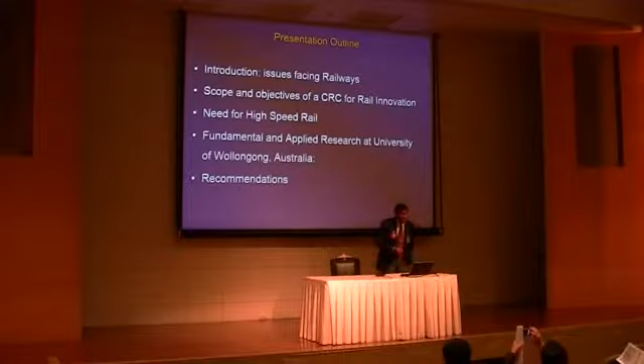The presentation outline I have is looking at the issues facing the railways currently, and some of the problems you will see in Australia are common to the rest of the world as well. I will look at the scope and objectives of a CRC for Rail Innovation, the cooperative research center framework that started all this research in Australia in a cooperative scheme, which I will explain in more detail later. And the need for high-speed rail.

Is there really a need for high-speed rail? If you really need high-speed rail, why do you need that? Is it just for competition with the rest of the world, or is it because the country really needs it? Those are philosophical issues that need to be addressed both politically and socially.

The fundamental and applied research: if you are going to modernize the railway tracks and do a very good job of these rail tracks, then you can't do trial and error. It's risky. If there is a derailment of a train with hundreds of fatalities, it only has to happen once and the entire country will regret it. So there has to be research. Governments will have to spend money and give universities that money to do research, because you can't do high-speed rail without doing the background research.

Every country is different. Every country has different soil conditions. Every country has different ground problems. So you can't simply copy from Japan or China and think that it will work the same way. I will address some of these things in detail as well.

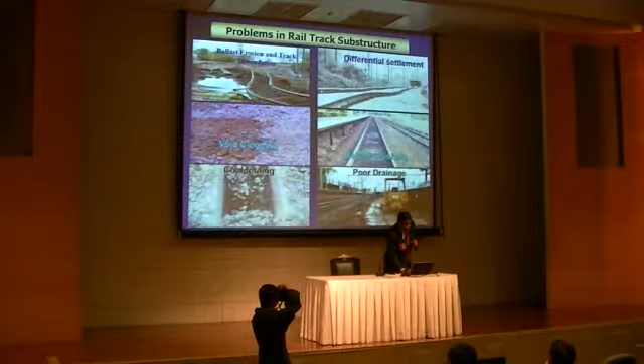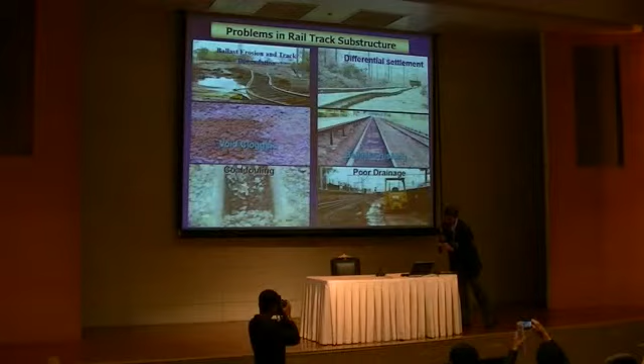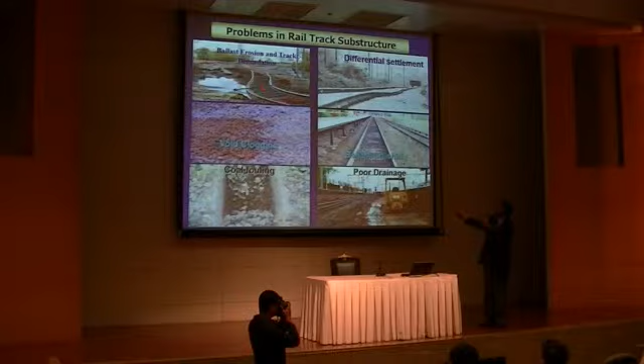Now some of the problems you see here in railways are common to many countries. Flooding. Now that's a slide where constant flooding in the state of Queensland, Australia, has practically affected railway tracks. If you look at this track, there is no ballast left. The rock particles have been taken away by the floods. If you look at this track here, you can see the differential settlement, and that is because of the very soft soils in the coastal areas.

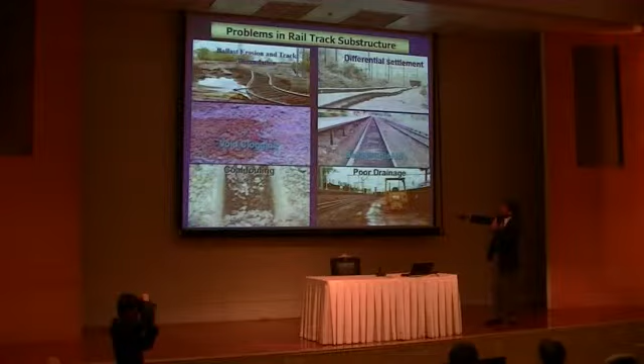And Thailand is no different. Soft Bangkok clay is well known in the world. You are going to get settlement of soft soils, and that is what happens at high speeds. Some of the soft soils below the track will liquefy under high cyclic loads, no different to what happens during earthquakes. The soil will liquefy at certain speeds and pump up and pollute the ballast, then dries up, and this mud clogs the voids of the particles. When that happens, there is no drainage, and that's what happens here.

Now this is a track close to the University of Wollongong. The railways can't operate, so all the students have to take buses. That's quite common. You can see the amount of water here after the rainfall, because the tracks are no longer drained due to this problem. So the tracks have to be abandoned until repair and maintenance works are implemented before the track can operate.

Ballast crushing is another problem. At certain speeds, particles start to break up into smaller particles. And once the particles become smaller and smaller, the bearing capacity of the track goes down very quickly.

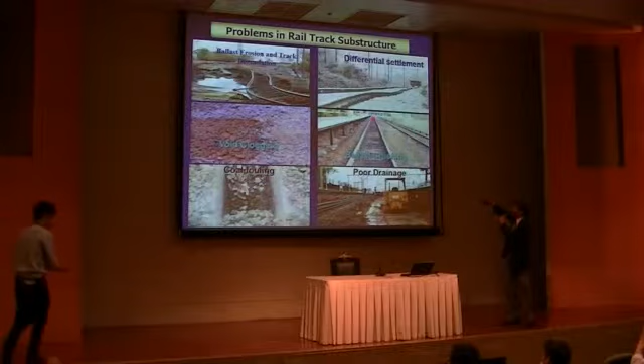It goes down exponentially because the friction angle of the particles exponentially decreases when the size decreases. So that track is abandoned. If you look at the sides, you can see the particles, but not in the middle of the track, and those particles have been broken.

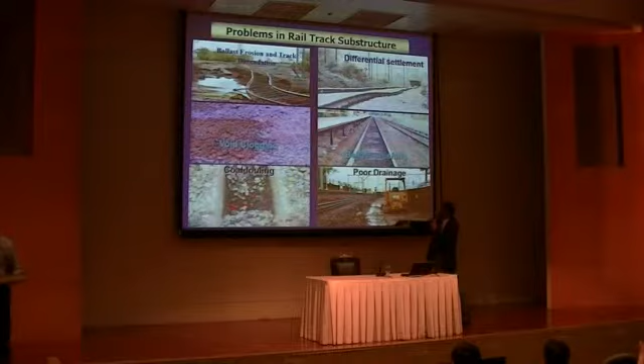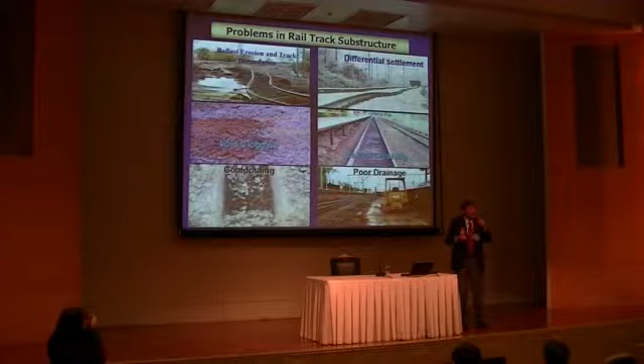Then we have the problem of coal fouling. Now that's a man-made problem. Coal tracks, coal carriages, when they travel, especially in the state of Queensland in Australia, you fill the wagons too much when the train is stationary. But when the train starts to move, all these big mounds of coal start falling down into the track and start clogging. It's the same problem as that now - you don't get drainage after that.

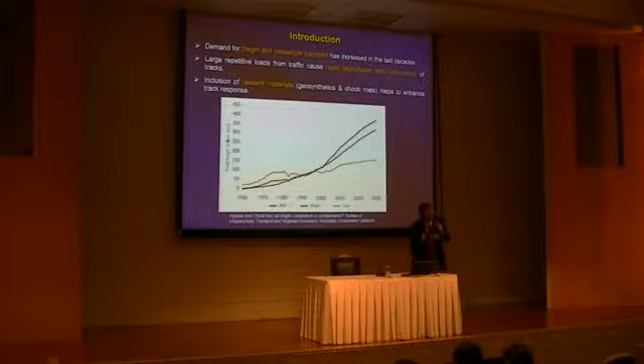Ports seem to be relatively stable because it's not easy to expand harbours everywhere. But rail in a big country like Australia can be made anywhere - you can have shorter routes. So this is what you see: the demand for rail has been increasing significantly, and I believe this is the same situation in most other big countries like US, Canada as well.

So just to give some idea of the Australian rail scenario, currently there's a labour force of about 45,000 people in Australian rail - that's employees directly employed in railway organisations. And then 70,000 plus people work in industries, both civil, electrical, mechanical and so on, providing services for the railways. So altogether, approximately 120,000 people are involved in railway-related employment.

If you look at the amount of funding the Australian government has been spending, 36 billion is investment in commitments for rolling stock and track. Now that's not a huge amount of money if you think of Australia as a big country in geographical size. But we have only 22 million people in Australia, so in terms of population, that's a very decent funding.

We have 44,262 kilometers of track in Australia, the second largest in the world. 725 million annual customer journeys - for 22 million people, that's a lot of traffic. 853 million tons of freight moved. Being a big mining and agricultural country, a lot of produce from mines and agriculture has to go interstate very quickly, where trains are obviously the best choice. That's a lot of movement for 22 million people.

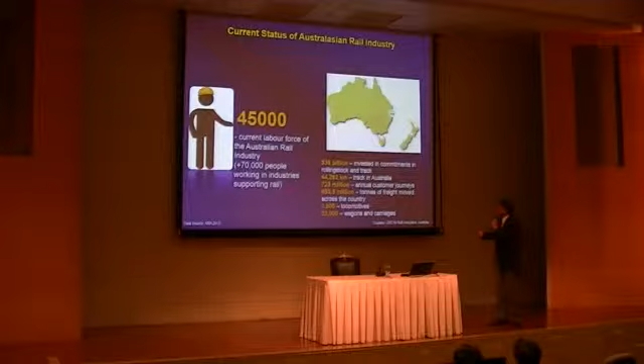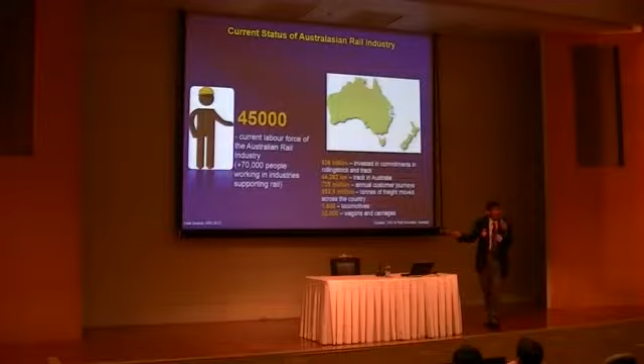We have 1,800 locomotives traveling across the country and 32,000 wagons and carriages. These are statistics from 2012, so this is very recent and increasing as we speak.

Now coming to the railway research culture - I think when I asked Dr. Pirupong exactly what he wanted me to talk about, he said that Naresuan University and other universities want to organize a cooperative research culture and do work on railway research, and whether I could give some hints as to how I started this in Australia in the 1990s. And that's the cooperation - that is the main key word.

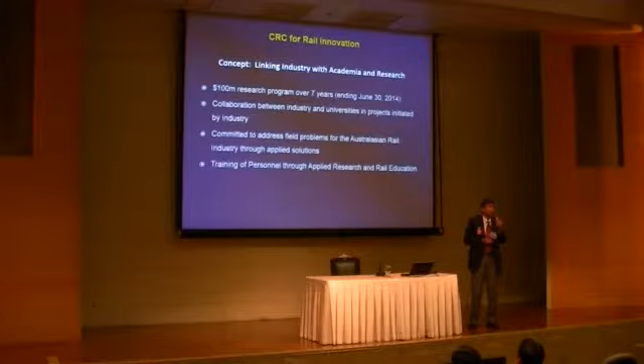The concept of the Cooperative Research Center, CRC, for rail innovation is currently the biggest cooperative research center in Australia. Before this, about 14 years ago, I was one of the pioneers of the Cooperative Research Center for Railway Engineering. It started in 1999 together with 6 other universities and about 10 different railway organizations. So the cooperative culture - academics can't do it on their own because they don't own railway assets. You need to get the industry involved, get the railway organizations excited and get them involved. That's linking industry with academia and the need for research.

It is not easy to convince, especially the political circles, at least in Australia, that you need to do a lot more in research. Railways is an area where, in many parts of the world, very little money is put in for research. If you look at the amount of money put into airports, roads, and harbours, you will find that railways deserve a lot more than what countries generally spend these days, and that includes Australia.

A $100 million research program over 7 years is what the CRC for Rail Innovation has brought. Of course, this particular railway research center will finish at the end of June 2014. So what happens after that? Well, obviously there will be another railway research center, maybe with a different name, perhaps the Cooperative Research Center for Rail Manufacturing, or some other name. But the CRCs will continue and we'll get another 7-year funding.

This particular scheme of funding for CRCs is typically in 7-year periods. It's easy to get a renewal, so we've had it twice now for 14 years, but to get a third term we had to convince the Australian government a lot more why we need it. So that's what we're currently doing. We've already made the bid to Canberra, and fingers crossed, hopefully we'll get another 7 years from 2014 onwards.

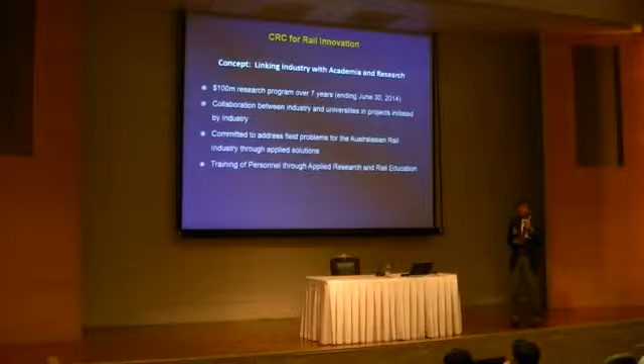What about all those PhD students who do PhDs in railway work? What's the point if they also just become professors? Some of these people who get trained in universities doing good quality applied research have to join industry — that is the best way of technology transfer. You train high quality students in Naresuan University, Mysore University, Chulalongkorn University, and so on, but some of these students who do the project have to join the railway organization and take on those challenges. That's the best way of technology transfer.

So in our CRC Railway Innovation, there is a commitment by the industry partners involved. The good graduates who are doing good work will automatically be absorbed into the rail industry at much higher salaries than university academics.

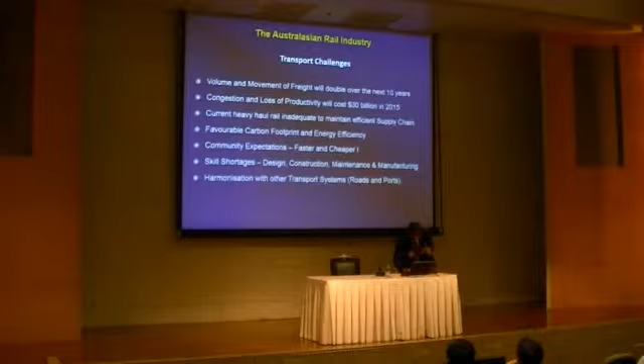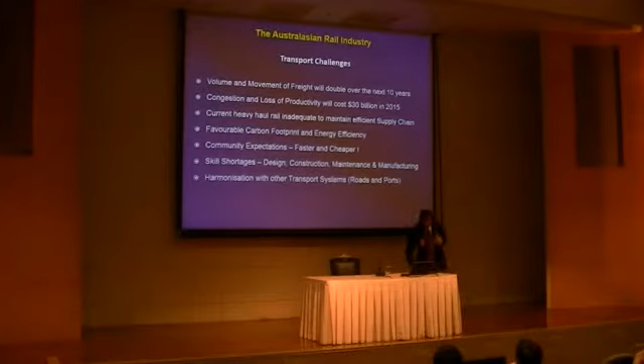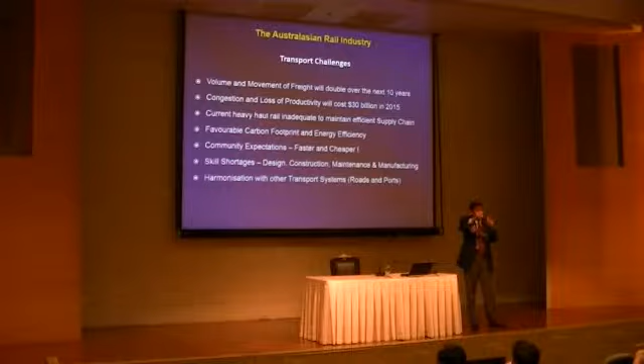Right, so what do we do? What is the summary of this? With the transport challenges we have, the volume and movement of freight will double over the next 10 years. I've already shown you the graph, how rail increases compared to roads and port.

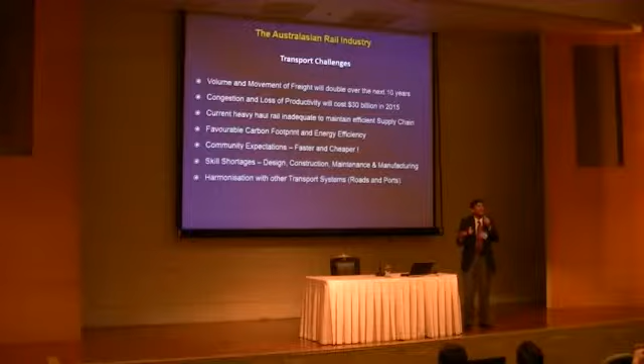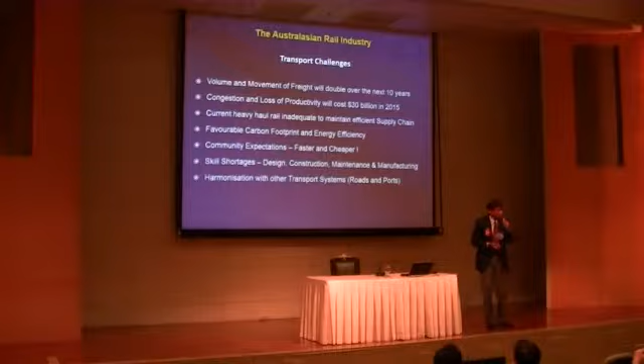Sometimes for $59 you can fly to Melbourne from Sydney. So the biggest challenge for any new rail network is what is going to be the cost of the ticket prices. If airfares come down, motor authorities are never going to proactively support rail, because if big companies like Holden and Ford in Australia proactively support rail, how can they sell their cars? So you always have the question of whether other transport organizations will proactively support rail.

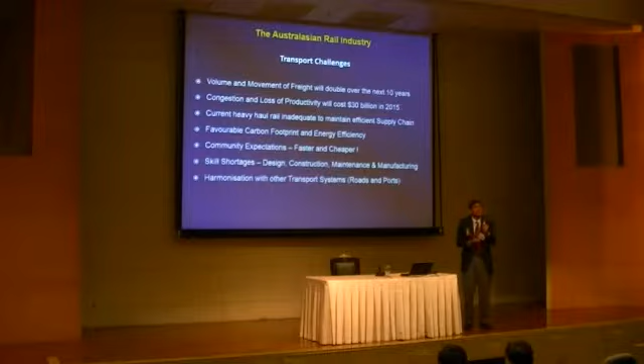This is where the correct political decisions will need to be made, and this is where industry colleagues and academics sitting here in this audience will have to strategically make plans and convincing strategies to influence the political circles. This is why rail is important, and it's not going to be easy, because you get competition from roads and airfares. That's the biggest challenge.

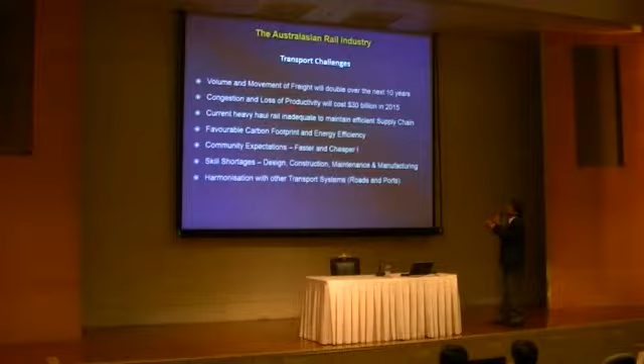The congestion and loss of productivity will cost 30 billion in 2015. Now that's an Australian scenario - the congestion and loss of productivity. What does this mean? Well, if train speeds can't exceed a certain desirable limit set by the community, they are going to drive their own cars, or they are going to get into a coach.

So the trains, if they operate, have to prove that congestion is relieved. In Australia, because of quite a lot of congestion, there has been loss of productivity estimated at 30 billion. That loss of productivity is also because of certain weather patterns. As I showed you, sometimes the railways cannot operate during Saturdays and Sundays because they are closed for repairs, so people have to take roads and other forms of transport.

So there is going to be loss of productivity. If railways are going to operate, there has to be reliability, no different to the roads. So how can you prove to the community that if the railway network is expanded, it will be as reliable as the road network, if not more?

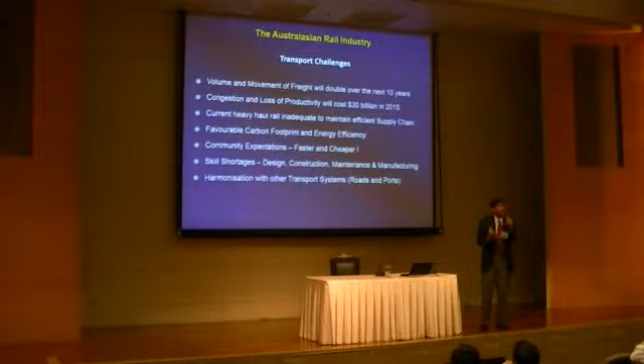Current heavy haul rail is inadequate to meet efficient supply chain needs. As I said, Australia is an agricultural country, we are a mining country. A lot of mining is done in Western Australia, Queensland and part of New South Wales. Most of the biggest international harbours are in New South Wales.

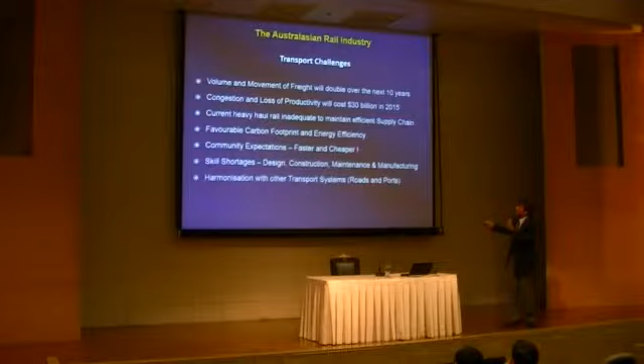So it doesn't matter where the mining is done - it might be Western Australia, it might be Queensland - but that produce has to be delivered to Sydney Harbour before it's loaded into ships to Japan, for example. So there has to be a quick mode of transport, and we don't have that. Our railway system is totally inadequate to maintain an efficient supply chain.

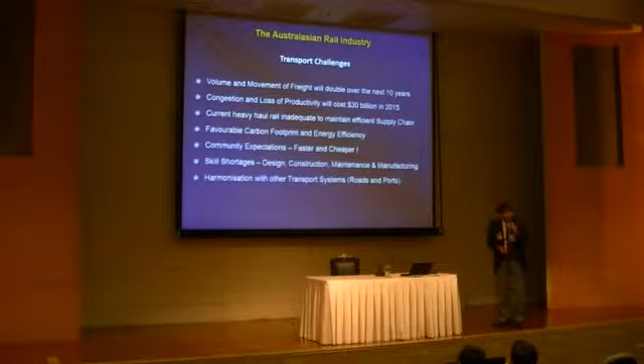So in Australia, politically we have a big pressure on the government to expand its rail network just to fulfill that inadequacy. Favorable carbon footprint and energy efficiency - we expect the trains to be energy efficient.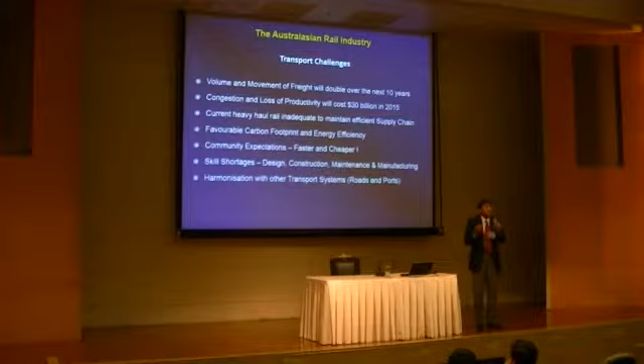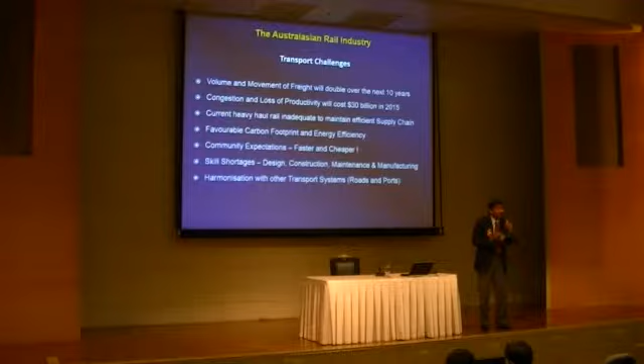Now trains are very heavy, especially freight trains in Australia. Those of you who have been to Australia and got caught at a signal light, you have to wait in your car for 5 minutes before you can go again, because the trains are very long and very heavy. Now the heavier and longer these trains become, if they are going to be carbon friendly, they have to go at fast speed. Slower the speed, the less energy efficient it is.

So if you are going to have long and heavy trains - 35 ton axle trains, and in Western Australia now they are making 40 ton axle trains, which will be the heaviest in the world - they have to go at least 150 kilometers per hour. What's the point of a 40 ton axle train going at 80 kilometers per hour? You might as well take the buses, or trucks if it's freight. So they have to go at high speed because of the mere weight of it.

Community expectations - well, the community is very strange in that sense. They expect, if you ask an average Australian, do you want a high-speed train, they will say of course we do, because China's got it, Malaysia is going to have it, Korea's got it, so of course we need a high-speed train. Then you can ask them, do you want it to stop by your doorstep? They will say of course yes, I want to get into the railway station in 5 minutes.

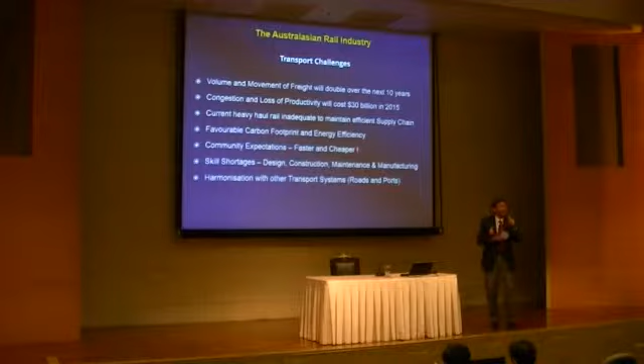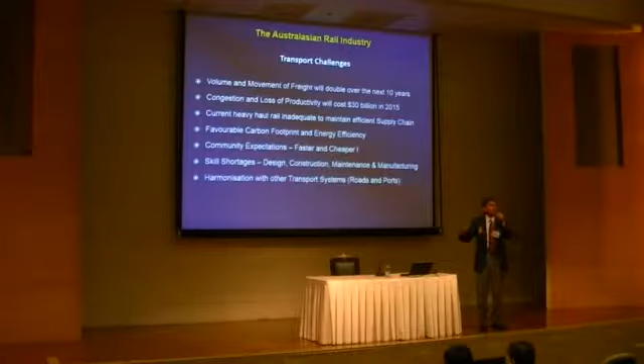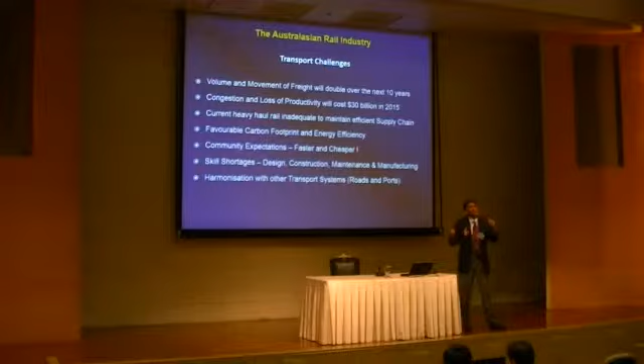But every person wants a fast train to stop at their doorstep. So how can that be fast? People have to accept that if a train is going to be fast, you can't stop everywhere. They have to be prepared to drive their car, ride their motorbike or bicycle to the nearest railway station where the high-speed train stops. People get very disappointed when they hear the high-speed train won't stop at Wollongong, that it will bypass Wollongong and go straight from Sydney to Canberra. So the Wollongong community says, well, we are not supporting the high-speed train, we are better off with the government giving that money for schools in the Wollongong area. This is a typical example of the community problem. We have to address these community expectations.

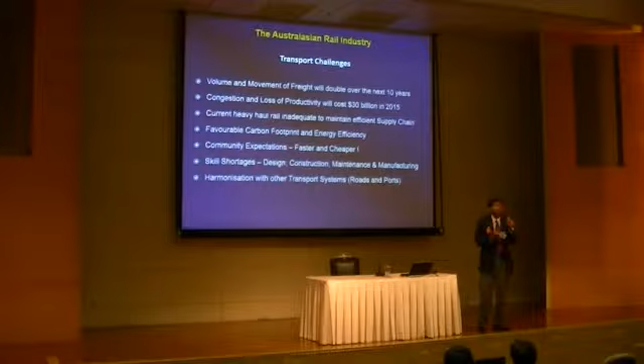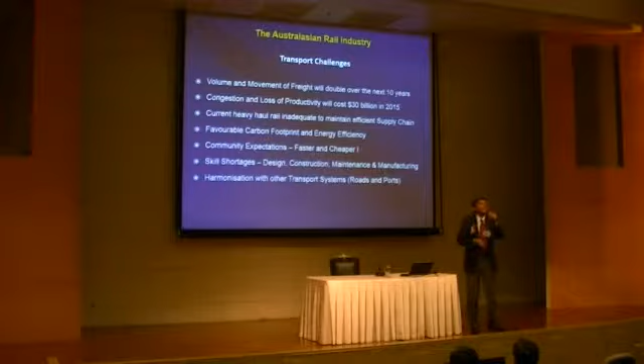Then we have the skill shortages. It's very easy for someone in the political circle to make a big decision: China's got a high-speed train, Korea's got one, Taiwan's going for it, Thailand is now going for high-speed trains, so we must be in competition too. But you've got to look at the skill shortages. How can you have high-speed trains if you don't have enough trained people? How are you going to overnight train people? In civil engineering, do Thai universities teach railway engineering to undergraduates? Do academics here teach railway engineering to civil engineering undergraduates? You don't. Well, in Australia we don't either.

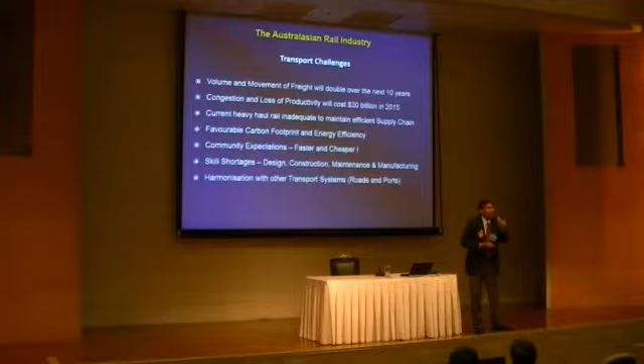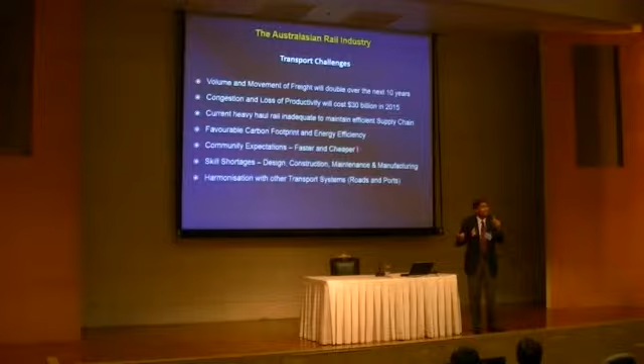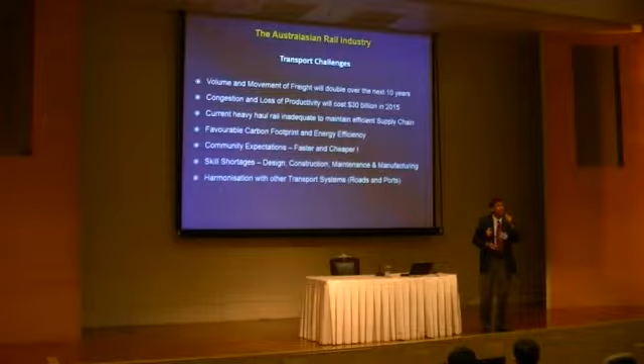But I'm sure you teach road engineering. There you go. So you teach road engineering to civil engineering undergraduates, but not railway engineering. So there's no doubt why there are skill shortages, because a civil engineering undergraduate will only ever travel in a train, not know anything about railway design. That's a big problem. A civil engineering undergraduate, when they graduate, knows how to design a road. They even teach harbour design in some of our programs, but not rail design. And if you try to introduce rail design, some road engineering academics say, sorry, we don't have enough time to teach that. So you've got to take into account these challenges as well.

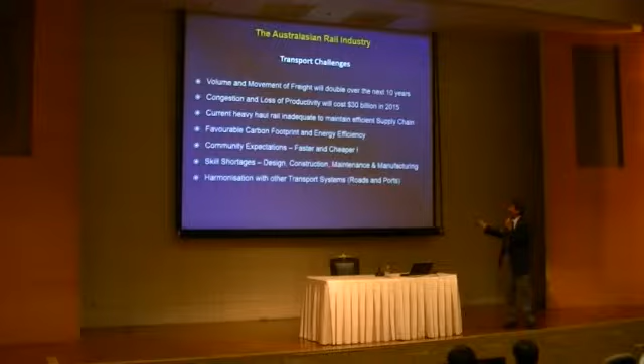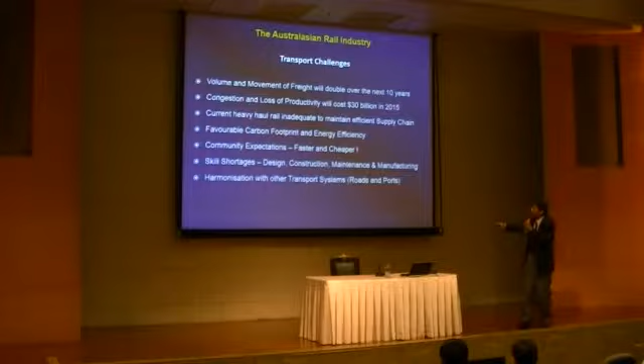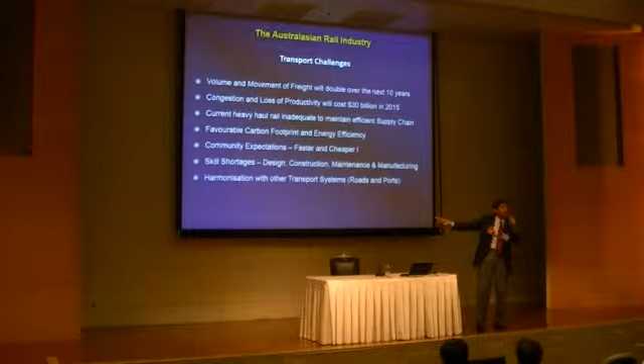So design, construction, maintenance and manufacturing all have to be taken into account. Harmonization with other transport systems is also key. You can't fight with other transport authorities, you've got to amicably harmonize with roads and ports if railway is going to be successful. Because at the end of the day, the railway has to start, for example, with a mining company, and the ore has to be delivered to a harbour, and the support services have to be provided.

Okay, now I'm coming to the real research part. This is all philosophical—I just set the scene, both political, social and economic aspects of it—but now I'm coming to the real research part. In railways, my specialty is track and below track. I'm not a mechanical engineer, I'm not an electrical engineer, so I'm not going to talk about locomotives and how fast the loco can go.

That's for the electrical and mechanical engineering colleagues. And it's quite easy to convince your mechanical engineering colleagues that it's not worthwhile designing trains that can go 500 kilometers per hour, because the thing still has to go on the ground. So the geotechnical engineers have to be there to build the tracks. There is no point ordering bullet trains from France, the TGVs, to Thailand if the Thai geotechnical engineers are not going to make the tracks. So the track is the first thing.

So we have ballast, which takes the load. Now if you look at Australia, the Australian standards are totally inadequate, even for trains to go at 150 kilometers per hour. When I started rail research in the 1990s, I was honestly shocked at how some of the Australian standards were made. I couldn't understand why ballast had to be uniform, like a jar of marbles, with every particle the same size. This defeats all my understanding of soil mechanics. If you're a civil engineer, you know that if particles are all uniform, you can't get sufficient friction. Particles have to be more broadly graded, mixing different sizes so they interact better and give much higher friction. So the Australian standards had to be changed.

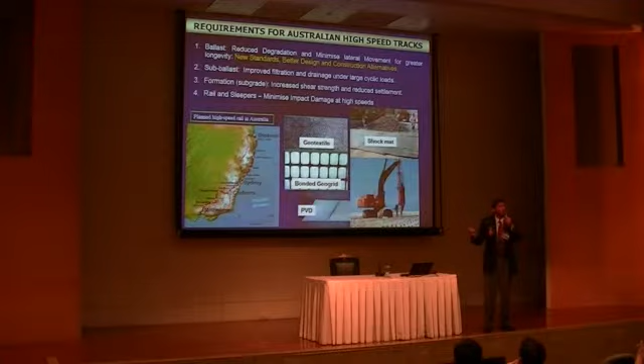Then we have the sub-ballast. What is underneath the ballast? Underneath the ballast you can have rubbish rock - things thrown out of tunnels, things thrown out of mines, what we call waste rock or riprap. These can be brought in as sub-ballast and compacted, but they still need improved filtration and drainage under large cyclic loads. The difference between slow trains and fast trains is that fast trains apply these large cyclic loads. Then we have the problem of formation.

This is something very common between Thailand and Australia. I learned about soft soils when I was at AIT, because I realized when I came from Canada, I was very familiar with boulder clays in Canada, which are very stiff. And when I was in London, it was London clay, which is very stiff. But then I came to Bangkok, and I couldn't believe how soft the soil conditions are. My first experience of soft soils was actually in Thailand.

I quickly changed my field. When I went to Australia, I realized, oh my God, in Australia the soft soils are even worse in some parts. So that's how the formation area became a real critical issue in our research program.

One of the real technical reasons that Australia can't have high-speed rail very quickly is because we need to spend a lot of money on ground improvement to improve the shear strength and reduce settlements of compressible soils all the way down the eastern coast. Very, very soft soils where undrained shear strength is often less than 10 kPa - that's very soft, even softer than Bangkok clay.

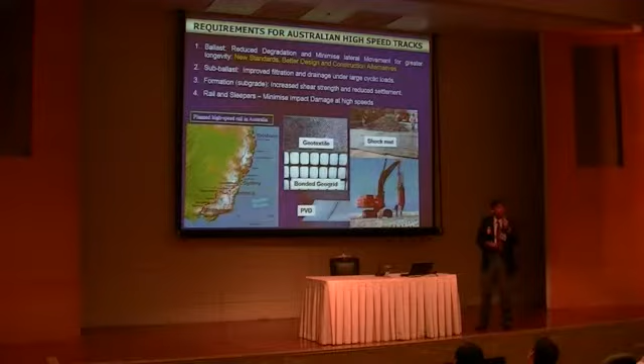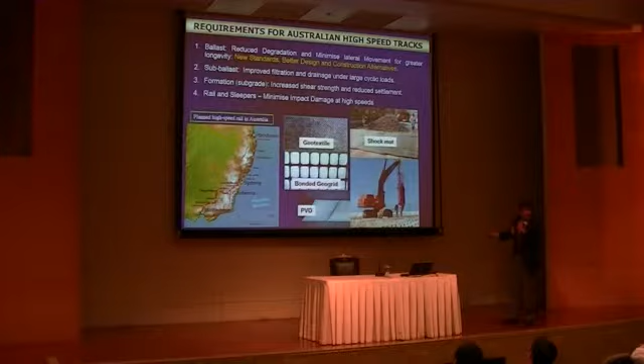There are some pictures here of the type of geogrids and geotextiles that can be used to improve the conditions of ballast and the formation. Vertical drains need to be driven into soft soils before the tracks are put in. Shock mats absorb the energy from the trains so that the ballast doesn't crack. I'll go through these a little later.

High-speed rail runs at significantly higher speeds than conventional fast trains. Conventional trains are normally less than 200 kilometers per hour. The fast trains with the highest speeds operate in Western Australia and Queensland, around 160 kilometers per hour. The fastest in New South Wales is around 150. But you can easily go up to 200 kilometers per hour on conventional good quality ballast track - up to 200, there is no problem.

But beyond 200, conventional rail tracks are not good enough. They run the risk of derailment if you exceed 200. So we're talking about 350 kilometers per hour - that's a good number. 300 to 350 is good for high-speed rail in most countries, including France, Spain, Japan, China, Taiwan, Germany, Italy, and UK.

The European Union definition is easy to achieve - 150 to 200 kilometers per hour for upgraded ballast tracks. They've done a lot of experiments and field trials, and in France, up to 200 to 250 has been achieved with upgraded ballast track. That means they've changed the quality of the ballast a little - maybe the sleepers are a bit closer, with more confining pressure on the track. 200 to 250 has not been a problem, so we're really looking at increasing by only 50 kilometers per hour for high-speed trains. But that's where the problems are - when you try to get that extra bit, the tracks get degraded and damaged.

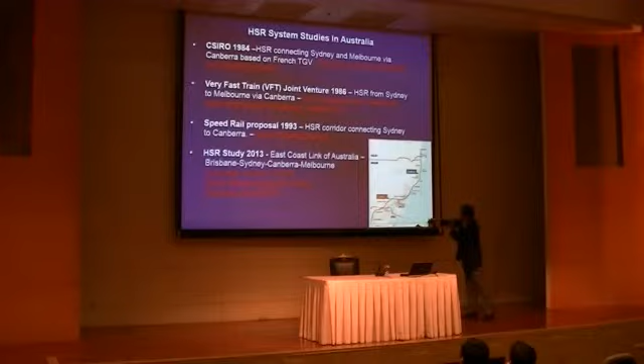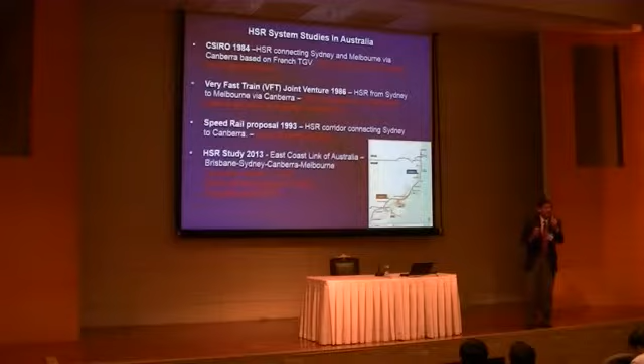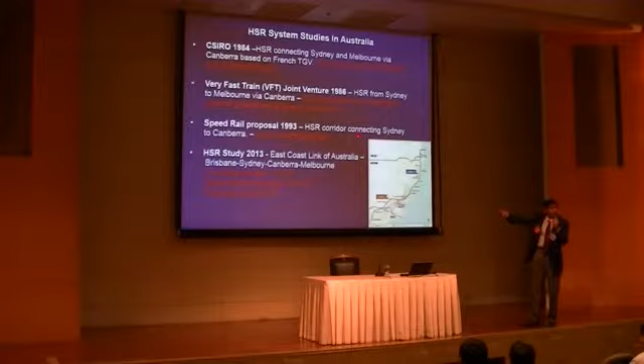That track, line 1, is about 1,000 kilometers, and line 2 from Sydney to Melbourne, bypassing the coast and going inland, is another 1,000 kilometers. So 2,000 kilometers, meaning every kilometer of track costs $60 million. Just think about it, 1 kilometer of rail track costs $60 million, and this cost is rising as we speak, because we're not going to build this track next year in 2014, it's going to go 10 to 15 years down the track, and inflation is always on the way up. So the cost is actually going to be more.

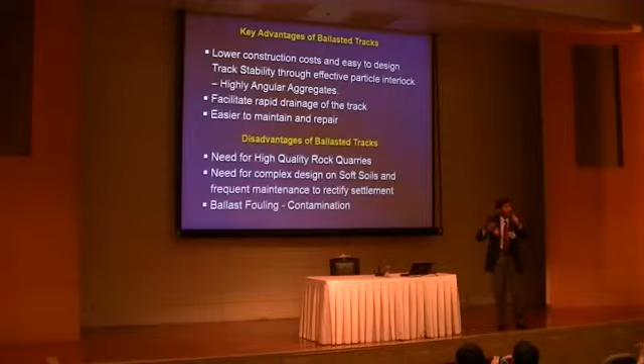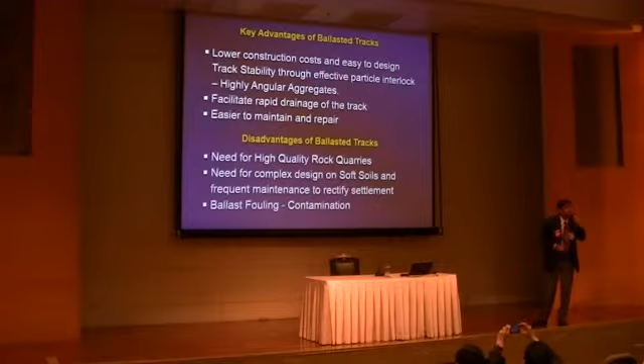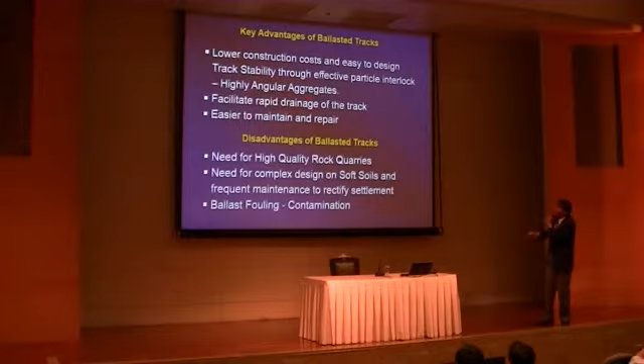So coming to the key advantages of ballasted track. I'm not talking about slab tracks supported on large concrete piles, and I'm not talking about maglev. What are the advantages of ballasted tracks? Lower construction costs and easy to design. You can train undergraduate students in universities to design ballasted rail tracks, that's not a problem. You only need effective particle interlock and highly angular aggregates. As long as you have these materials, basic soil mechanics can enable good undergraduates in their final year to do thesis work on this kind of thing. It's not rocket science, it's only a railway track.

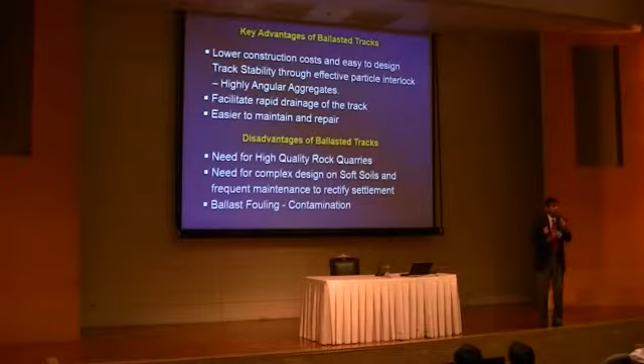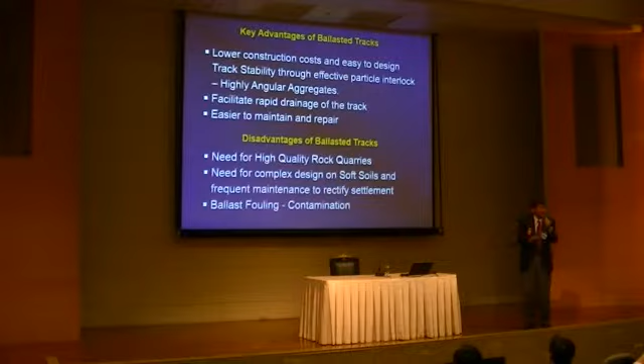Facilitate rapid drainage of the track. If you have good quality ballast and good quality sub-ballast, a railway track can be designed to have rapid drainage, especially in countries that have heavy rainfall, like Thailand, Malaysia, Southeast Asian countries, and Australia on the eastern coast where we have a lot of rain. That is a very important aspect.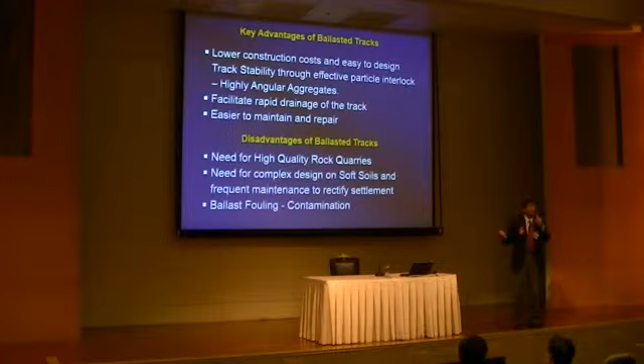Easier to maintain and repair. If something goes wrong, you can dig it up, put new ballast in, put new concrete sleepers. Repairs can be done very quickly. Not if it's a slab track and the concrete slabs are cracked - that takes a long time to repair.

What are the disadvantages of the ballasted track? The biggest disadvantage is the high quality rock quarries. Where do you find them? Can you find them? How efficient is it? And how long can you sustain them? And also, how strong are the environmental groups in your country?

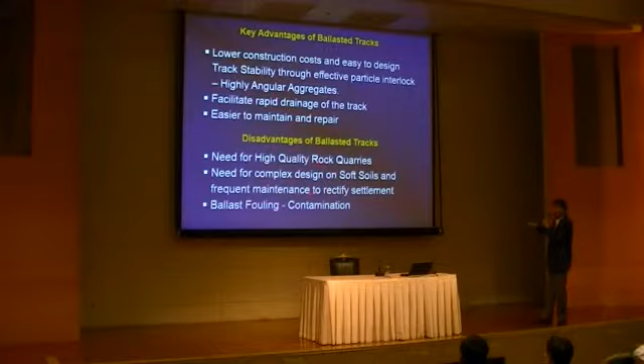Need for complex design on soft soils and frequent maintenance to rectify settlements. Countries where there are a lot of soft soils - compressibility, differential settlement - is going to be the challenging part of design, and therefore that needs to be taken into account.

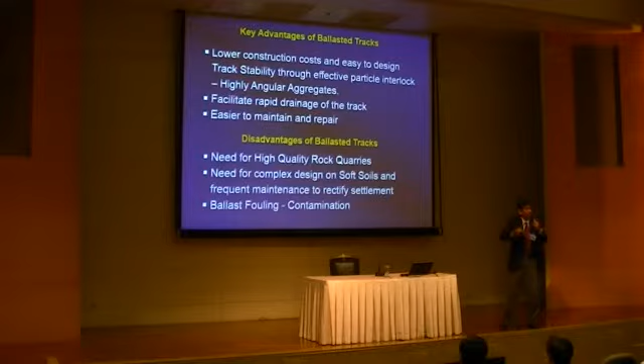Then of course you have the contamination of ballast. If you are carrying coal, like in Australia, then you have contamination of the track with coal. If your soft soil is very soft and liquefies and pumps up and pollutes the ballast, then you've got to look at that ballast fouling as well. So those are some of the disadvantages of these tracks.

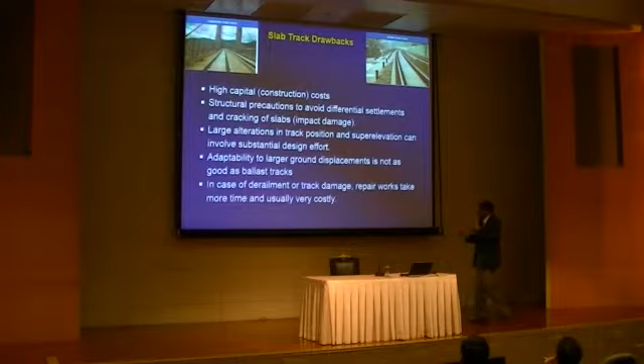If you have slab tracks, what are the disadvantages of the slab track? Now, those slab tracks that have been designed on concrete slabs have very high capital cost - initial construction costs are much higher than ballasted tracks. Structural precautions are needed to avoid differential settlements and cracking of slabs, since these are concrete slabs, there can be impact damage, there can be cracks.

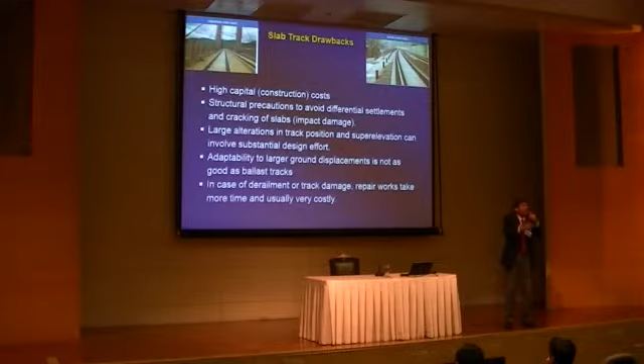You have to regularly maintain and inspect for cracks, especially the connections between the slab and the columns. You need to look at that under impact load. Large changes or large alteration in track position and super elevation, especially at the bends, are not easy to design and normally involve substantial design effort.

Adaptability to ground displacement - so if you are talking about soft soil terrains, a ballasted track can adjust itself. That is the advantage of a flexible pavement. Slab track is a rigid pavement, so the slab track is not as adaptable to large ground displacements, whereas ballasted tracks would be easily adaptable. In case of derailment, damage and repair works take more time for slab tracks compared to a ballasted track.

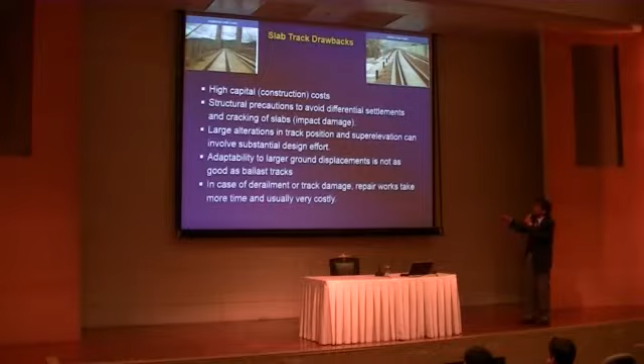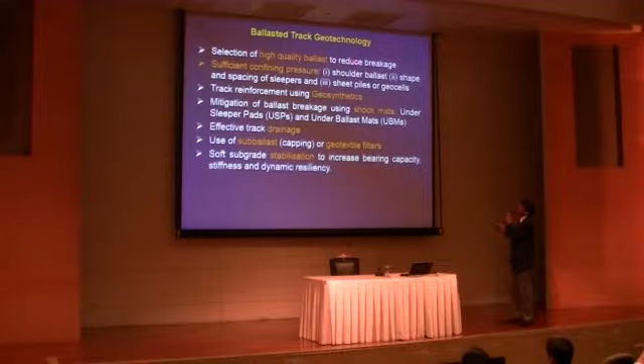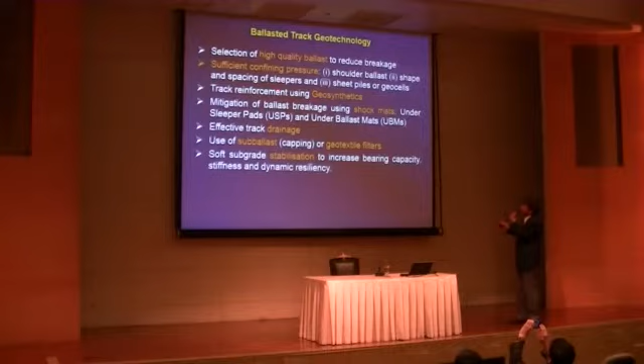So coming to track geotechnology, high quality ballast to reduce breakage is one of the most important parts of it. You need sufficient confining pressure, and I'll touch on this a little bit later in my slides. You can reinforce the tracks using geosynthetics - geosynthetics are quite cheap now. Thailand has a manufacturing plant for quite a number of geosynthetics, so that can be utilized very well.

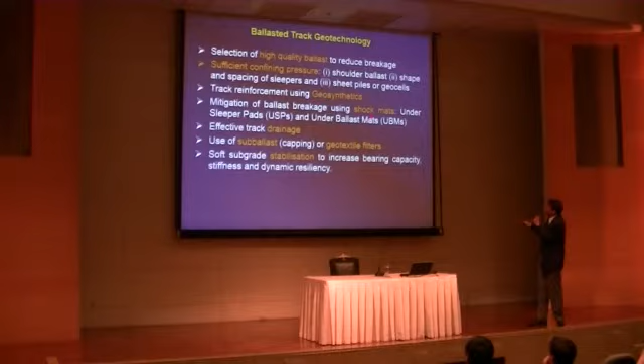The shock pads are a new introduction in terms of energy efficiency - I will look at that a little bit later. Effective track drainage, we need to cover that: the use of good sub-ballast and geotextile filters below the ballast layer, and then of course soft soil stabilization to increase the bearing capacity, stiffness, and dynamic resiliency, and that's particularly true in Thailand where you have a lot of soft soils.

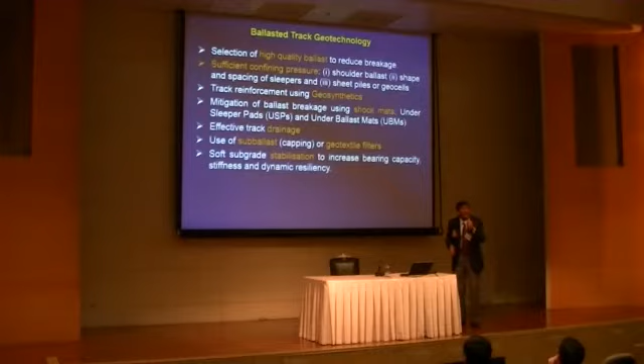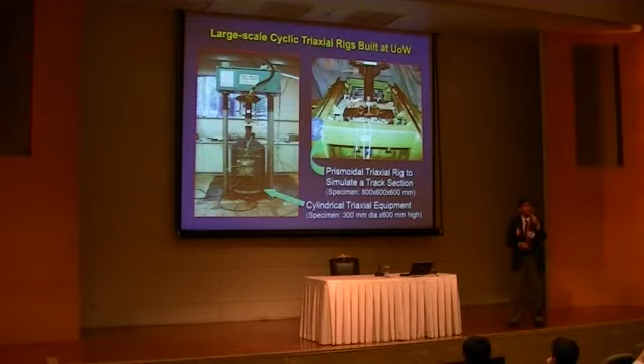Now, in terms of facilities for universities to look at this, the first thing you need to understand is you can't do railway testing with this little geotechnical equipment, okay? One particle itself is about that size - you can't fit 2 or 3 particles in a conventional equipment. So if you are going to seriously look at R&D work, research and development work at the universities, then you need to have the budgets to design large equipment like that.

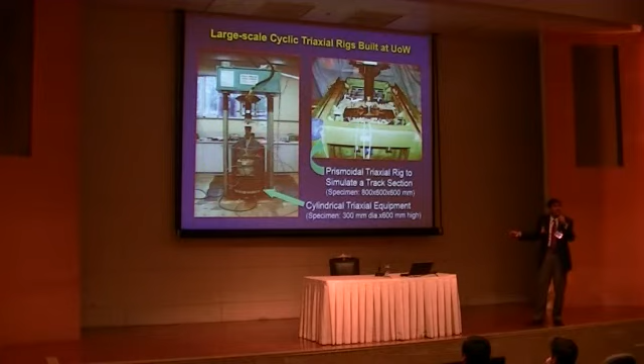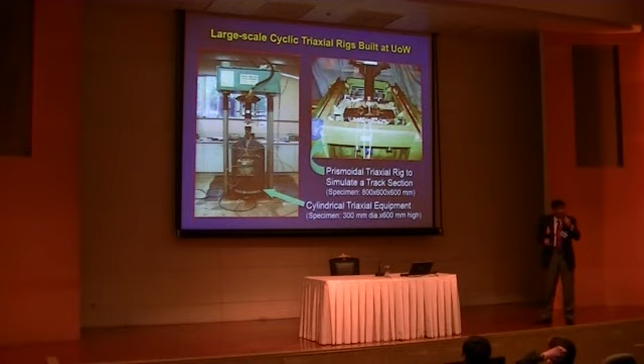Now that's a large triaxial equipment. At the time in the 1990s, this was the biggest triaxial in the world, but now there are triaxial equipment in other universities and research organizations which are even larger than that. Now that can do 300 millimeter diameter and 600 millimeter high samples. That's the largest cubical triaxial in the world still, and this was designed by me in 1996 and is still working very well.